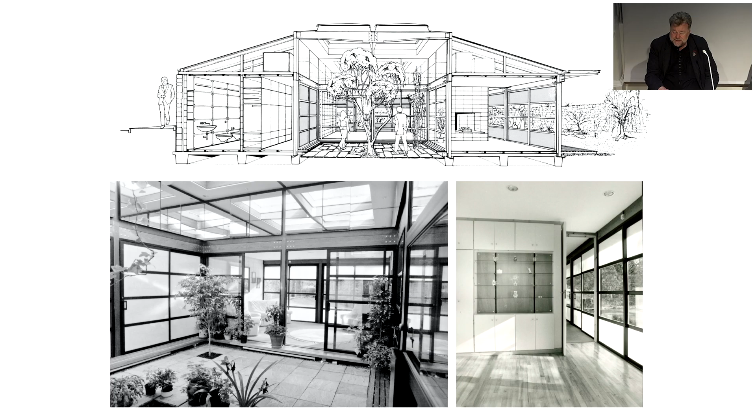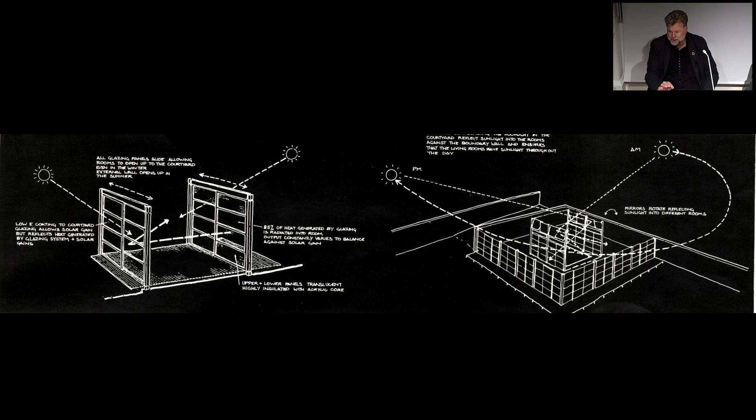It was designed very simply with a glulam structure framework. I've always been interested in materials, so it had a new glass technology invented in Finland, which is electrically heated glass. The low-E coating had an electrical charge put on it, which neutralized its U-value, giving highly insulated glass.

Basically, the building was in a kind of conservation area, so outwardly it was a stone building, but inwardly it was a very glass and glazed building. My parents lived there for many years. A while ago it was sold, so I actually managed to pick up this - this is just 2 years ago. I built this nearly 40 years ago.

So here we are, and we're going to have a little epilogue at the end where we finish in the same village where I was brought up in Scotland. Those are the Ochil Hills in the background, and here we have the little house. Outwardly, it's surrounded by a stone wall and reclaimed slate from an old disused building, which was part of the conservation deal. But inwardly, of course, it's just all glazing.

So yeah, excuse the graphics - that's not me. It was translucent glass, very simple. I remember the framework cost about £1,000, and the glass wall was £12,000. I can still remember the whole breakdown to this day.

It's a very simple house, but actually worked really brilliantly for them because it's one big open space that you could open and close. They've since changed, and buildings have to change, they have to flex. The new owners have converted what was the central garden into a music room, which works for them and probably works quite well. Originally, the central courtyard was actually a garden with a pond and so on.

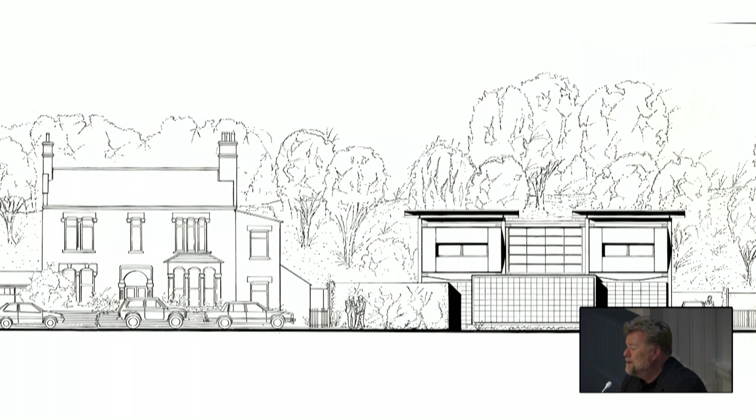After doing that, my wife and I decided, well, why don't we do our own house, which we did in Finsbury Park. We really learned from my parents' house and then used that again to develop our own house, which again was a glulam building.

This is now in the mid-90s. I was teaching at the AA. It was, I remember, £130,000 all in.

A glulam structure faced the street, so we had to have a kind of translucent wall facing south, and then a central courtyard, which again used passive solar heating. The central courtyard had a lot of thermal mass that captured the heat, and then we had a kind of Scandinavian air exchange system that took all that heat and used it to pre-warm the cool air coming in.

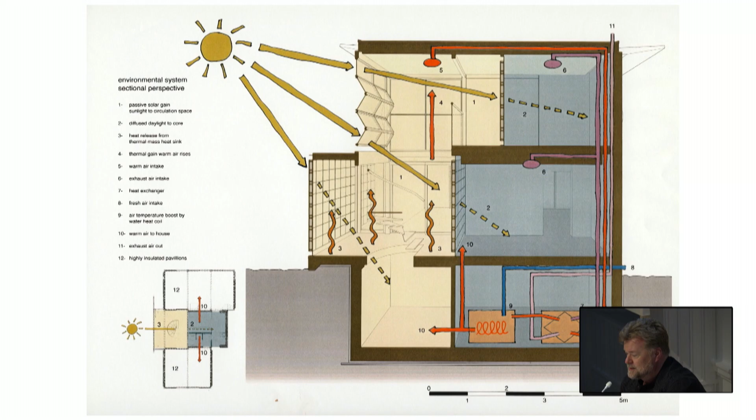So we basically built it ourselves with specialist contractors coming and doing different bits and pieces. I remember the frame was £2,500, glulam. Couldn't afford Douglas fir like my parents had, so we had to settle for white fir. But nevertheless, it was a fabulous building, and we really enjoyed living there and raising our family there.

But unexpected things happened, and we found ourselves moving to New York. So that's my little prologue of things you can do yourself, and I encourage you all to do the same in your own time. Actually, when you do things for yourself, you really learn, I think, more than when you do it for others.

So I'm going to talk about the last four decades at Grimshaw. I graduated in '86 and joined Nick at what was a 12-person practice. Now it's just over 600 around the world. So it's kind of evolved during that time, and so has the work we've worked on.

Really, when I joined, certainly in the late '80s, it was mostly industrial architecture that we did. And then really, by good fortune—being an architect is often about fortune, winning competitions, or just being at the right time at the right place—we were very fortunate. We did an exhibition that got us in the right place at the right time to win Waterloo. So a little 12-person practice found themselves doing the biggest infrastructure project in the country at the time, and I had to learn a lot of things very quickly.

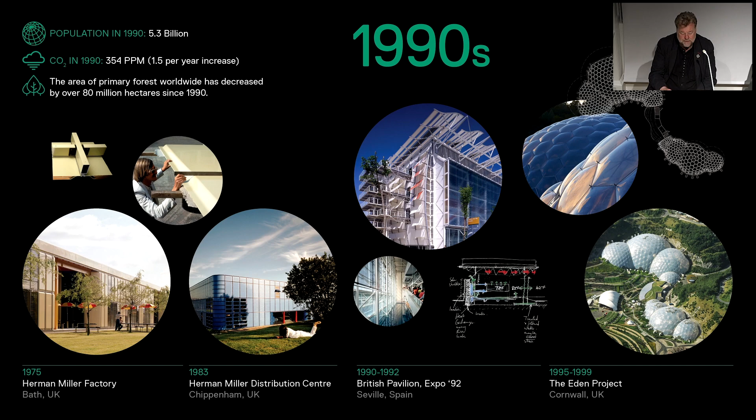But we then went on to win the British Pavilion at the World Expo, which I'm going to talk about, and the Eden Project, and so on. We've always had an interest in the impact architecture has on the environment and how it should respond, and how that informs its vocabulary.

As the practice has grown, so has the scale of projects, particularly in infrastructure following Waterloo, which I'm going to talk about their impact as well as we go through the different projects. But you'll read on the top left-hand side, as each decade goes on, how the population grows, the CO2 grows, and so whereas we might be interested in the environment, sadly most of the world hasn't been, but is slowly waking up. I think one of the challenges we have is how we turn the tide, which is what I'm going to talk about at the end.

So I thought I would pick up a number of projects and just pick up on aspects of those projects to explore. My first topic is harvesting the sun, which of course is a free resource you can use in all sorts of ways. And that's one of the things we did with the British Pavilion in Seville.

We wanted to explore what an architecture that responds would look like—this was the late 80s when we designed it, and there was an awareness in Europe, I think, of the impact buildings had on the environment. We were interested in exploring how that could inform an architectural vocabulary, how it would respond.

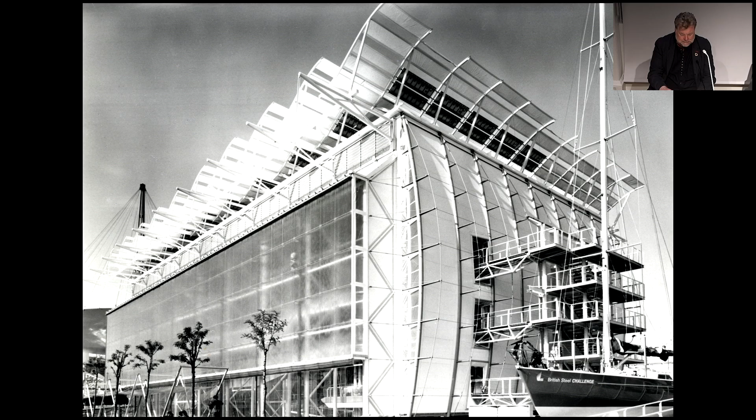The idea was, rather than trying to air condition the entire space—Seville is the hottest city in Europe—what if you create a buffering layer, and then just condition and cool it slowly? It's actually quite comfortable if you've got a large space and you drop the temperature to be in the 80s; you don't need to be in the early 70s. And then the exhibits themselves could be contained in lower temperatures.

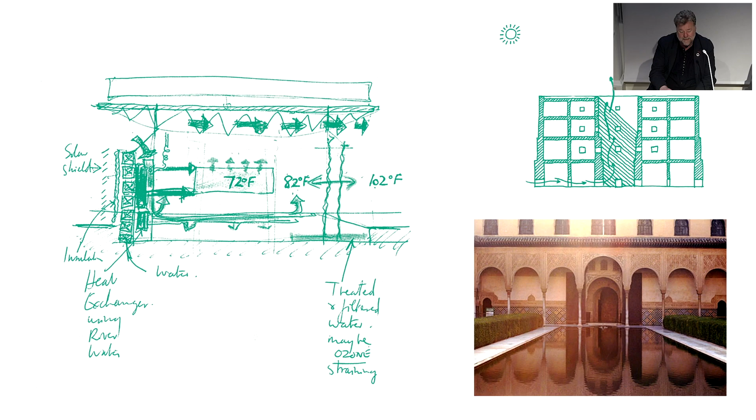The building had to be built in the UK—that was part of the condition—and then built very quickly in Spain. Often I think we've drawn on different technologies. Here, there's always been an interest in yachting technologies because they tend to be very lightweight, use fabrics, and are very easy to assemble. So the majority of the building was actually layers of fabric.

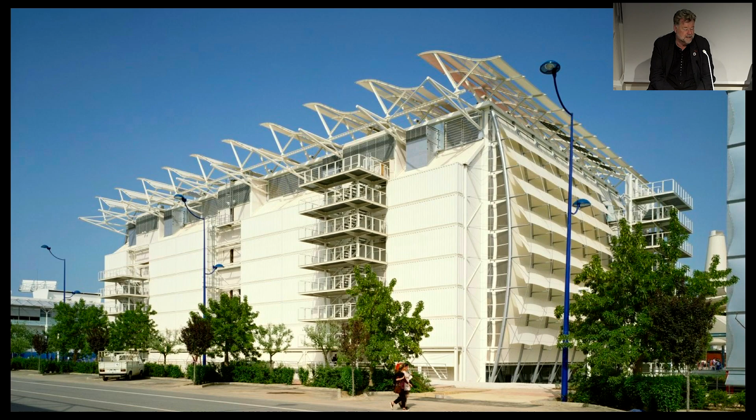Both particularly on two sides. On the back, it was actually built by stacking up disused shipping containers. The huge benefit that had, apart from being very easy to get and stack, is that we filled them, and it created a massive thermal mass that allowed us to cool the building at night time. We basically used it to absorb heat during the daytime and then recool during the night.

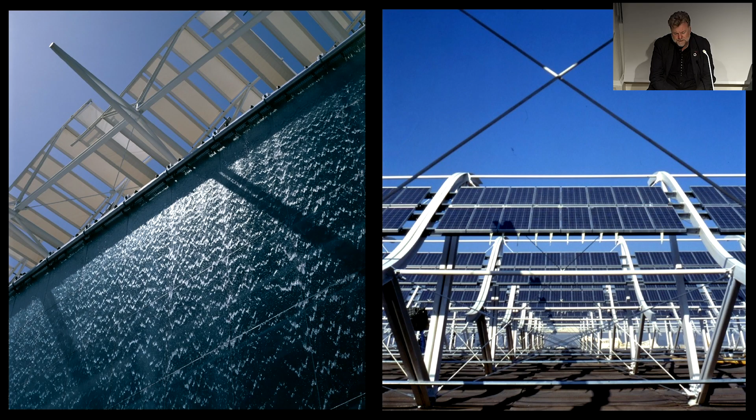And the main feature was the west-facing wall. There, it was probably one of the first uses of photovoltaics, which we had to borrow from BP - it was early days. They powered pumps that pumped water that then poured down the wall, creating this sort of calm oasis that you could go into.

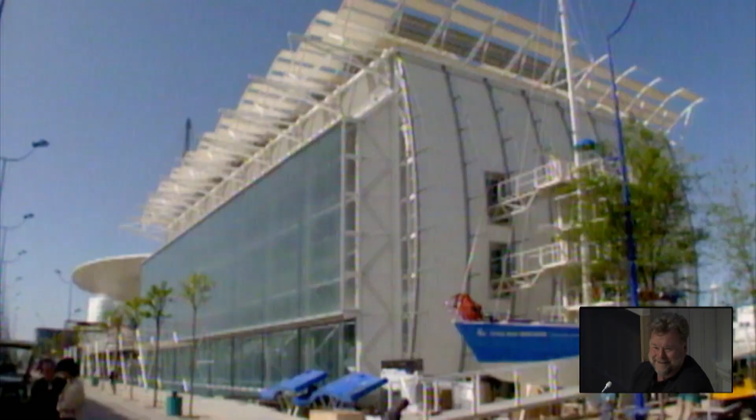Yeah, so this takes you back. Now, the reason this is so fuzzy is this is, for you youngsters, called VHS, which at the time was the height of technology - a cassette about that big. But anyway, this at least lets you see, because the building of course no longer exists.

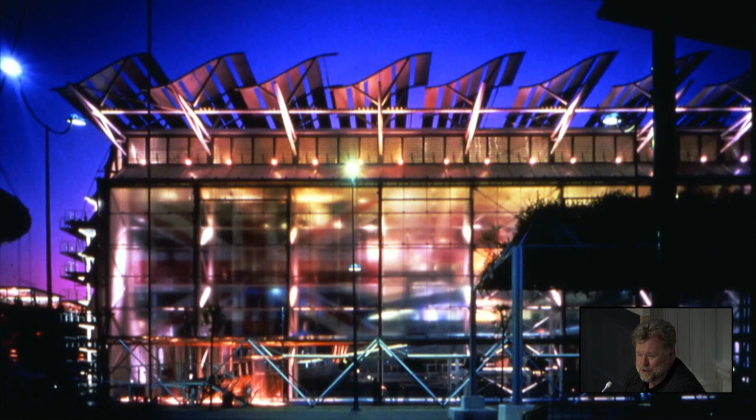You can see the impact of going inside the building, this water wall, and the feeling of coolness. Unlike a brise-soleil, which cuts out all the light, the lovely thing about the water was that it cuts out the infrared only, and the whole visible spectrum comes in, but with no heat. So the amazing thing was when you stepped inside, it was so cool, and all you heard was this crashing sound of water. For me, architecture has technological edges and parts to it, but also it must be beautiful and a sensuous experience.

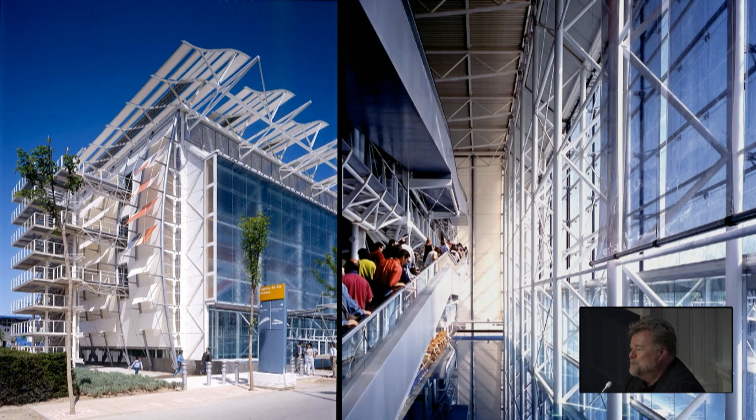We actually often use the term to try and encapsulate what our goal is: beauty through ingenuity. So ingenious design naturally leads, in my mind, to a beautiful outcome.

Another big inspiration for us, I think, has been inspiration from nature. I remember as a student, both when I was at Glasgow School of Art and also then at the AA, I used to spend a lot of time in the library with Frei Otto's Institute of Lightweight Structures. There was an amazing collection of books where he explored all sorts of things, basically learning from nature, whether it was spiders' webs, or bubbles.

And we're going to talk about bubbles now.

I've also had the good fortune on certain projects to have the opportunity to research. Following Eden, we've worked on a number of botanical projects, which allowed me to spend a few weeks in the Amazon rainforest. Like many people, you think of the Amazon rainforest as being the most biodiverse part of the planet, so it must be rich with nutrients that support this incredibly rich, fertile life. Of course, nothing could be further from the truth, because actually it's all built on a very thin layer of very sandy soil with very little nutrients on it.

That's why a buttressed tree, which is enormous, has buttresses - because there's nowhere to put roots down. The whole ecology of the rainforest is about being incredibly efficient with resources and using them in a very productive way. So as architects, it's such a great lesson to learn from.

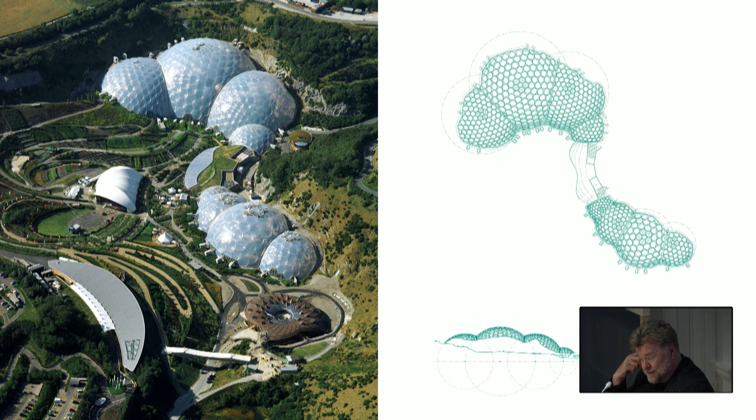So in many ways, it was an inspiration when we were doing the Eden Project. For those of you interested, there's actually quite an interesting exhibition on - I went this morning at the RIBA called Difficult Sites, and it's exploring architects' responses to very difficult sites. And we had a very difficult site. So, a couple of interesting guys.

Jonathan Ball was an architect, and Tim Smit, who was a real driver, was quite a force and became a good personal friend. He had this idea of creating giant enclosures to create an entire rainforest in Cornwall.

We found this site that was actually coming to the end of its life. It was an English China clay quarry, and they were trying to get the last bits out before they sold it on. So the site was changing form and shape, and we couldn't design a building to go into it. Originally we designed it a little bit like Waterloo, but I was very keen to use what was a relatively new material then called ETFE, ethylene tetrafluoroethylene.

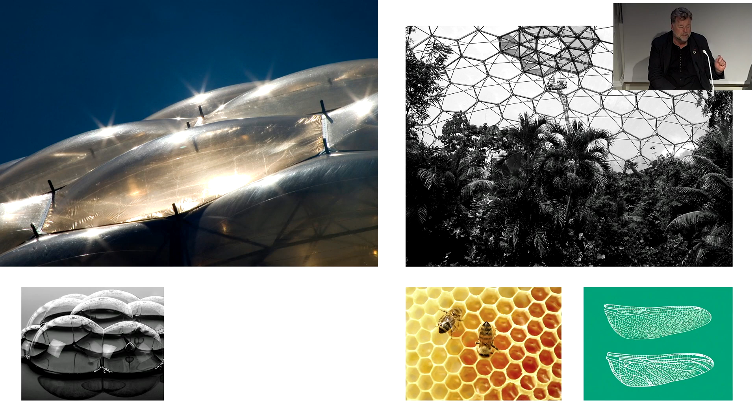It was a very lightweight polymer, an inert material, but it uses a fraction of the weight glass would use. So a glass and steel building, which is where we started, would have used—this uses less than 10% of the same volume of material because it's so much lighter, the steel frame's lighter, there's no material in the ETFE.

Again, this inspiration from nature—I remember Frei Otto had explored dragonflies' wings and how they connect, and that was quite an inspiration for us. Ultimately the idea was creating a form of interconnecting spheres, since soap bubbles never change their diameter or geometry no matter what size they are as they interconnect. It's got an interesting mathematical science to it. So the idea was if we made it in spheres, it could connect with the quarry in any formal way, and we could change it—it was a very dynamic response.

The thing I've enjoyed about Eden is there's a whole collection of buildings. Everyone focuses on the biomes, but the first buildings we built—the visitor centre, which opened the year before the biomes—were made using traditional cob, rammed earth, using the clay from the quarry. The reason it's pink is it was actually the original clay used for the FT paper, believe it or not. So that's why it's that pink colour. And then we used rocks we had excavated for the gabion walls and so on—so it's very much about being grounded in the earth and part of the landscape.

But of course, everyone goes to experience the biomes and step into the rainforest. Hopefully it allows a lot of people to experience the Amazon without having to fly there. So if you haven't been, I think it's an enjoyable experience, and there are also some lovely other gardens around there.

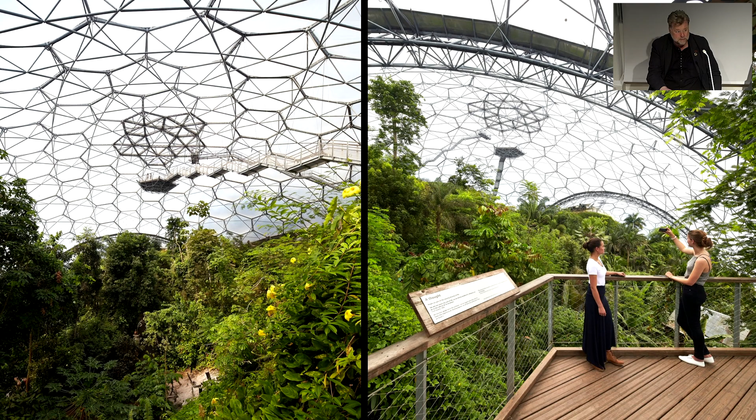It's been an ongoing relationship with us now for over 25 years, working with Tim in various ways. The Eden project has grown its own campus, and we've done various other projects around it. It's just building at the moment a very deep geothermal energy source that will provide all of its final power and heating, and also for the village of St Austell. But for me, the most exciting part of Eden is the impact it's had on the southwest of England.

It's hosted things like the G7 conference and so on, but it's actually created, outside of the project itself, over £2.5 billion worth of investment to southwest England and Cornwall, and has been part of a real transformation over the last quarter of a century in that part of the world.

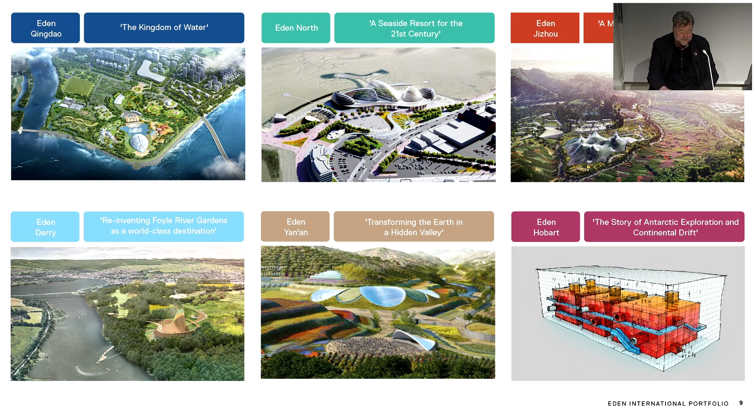So we've now been working with Eden on a whole series of different projects. Qingdao is the furthest ahead—I've only got old photographs I'm afraid, but it's pretty well finished. Each one has its own theme and its own response.

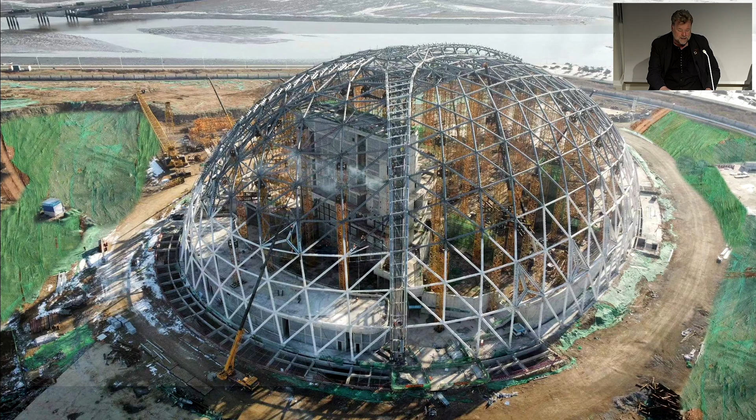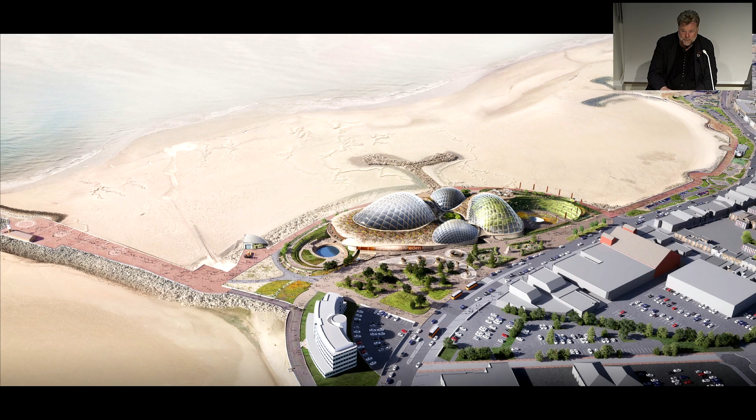And of course the latest, which I was very pleased about getting further funding for in yesterday's budget, is Morecambe—again a seaside resort town that's very much on its heels. I think this will have a similar transformational effect on the local economy. Eden itself employs over 400 people in Cornwall, and you can probably quadruple that for its local impact. So hopefully this will have a similar impact, as well as being a real inspiration for the next generation about learning from nature.

So a few years ago, I went to a fascinating conference with David Attenborough and E.O. Wilson, the Geographic Society, and little did we know, a few months later, sadly, E.O. Wilson passed away. But he coined this phrase, biophilia hypothesis, and for those who aren't familiar with it and his work, it's about our need as living beings to reconnect, to be connected to nature.

And if we live in cities that are just all concrete, with no, and we all experienced this during COVID, the real need to go into parks and to reconnect to nature. So his work was about this importance of connecting to nature, and it's something that I think we've tried to draw upon in our work.

So a good few years ago, when I was in New York, we were invited by Bloomberg's administration to put forward a competition for a new typology of affordable and sustainable housing. And we did this proposal with a guy called Jonathan, two developers, Jonathan Rose and Phipps. It was because they'd done competitions before and they never happened, and unless you have a client and a developer that's willing to take it forward, it's not going to work. So the idea was architects teamed with developers and put a joint proposal forward, and this was our proposal.

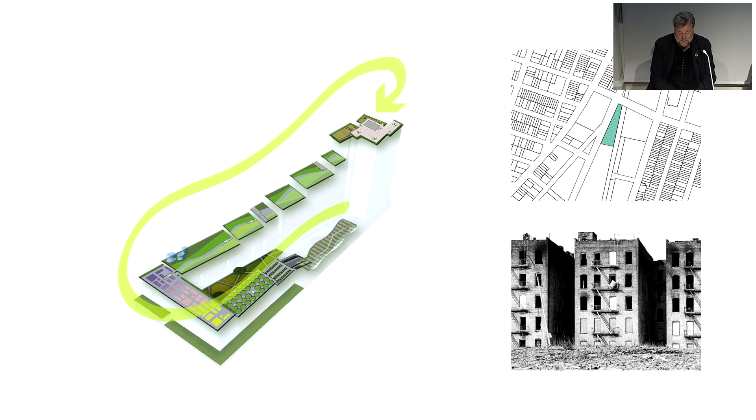So our approach was to create this sort of ziggurat of terraces where we kept all of the greenery and just put it on the roof and created a series of gardens. And it was a very challenging budget because it had to be built for the same price as the standard cookie-cutter affordable housing they do in New York. So that took a bit of imagination, but we managed to hold on to everything.

And because it was a narrow site, and that's why I found that difficult sites exhibition so interesting, because architects, when they have difficult sites, it's a bit like putting a bit of sand in for an oyster, it creates a pearl. If you have something to work against, it creates more opportunity to come up with creative solutions. So that narrow site allowed us to actually have all the housing cross-ventilated, which is absolutely unheard of in New York.

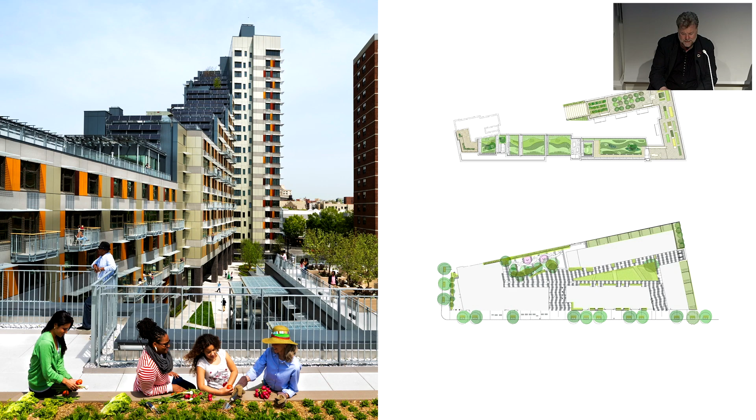And because they're sealed units with air conditioning normally, picking a little trick out from Corbusier, having the corridor every other floor allowed us to have every building have cross ventilation from one side to the other. So the circulation corridors are every other floor, and it meant that the buildings can open up to the greenery beyond.

They can be naturally ventilated, and these are 3 levels of affordability, from lowest income to different median incomes. And actually, the tallest part is purely rental, so it's for the lowest income, and then there are different levels of assisted affordability. 10 years on, the building's really doing well, and we shall see how it does in the Architecture Today awards later next month.

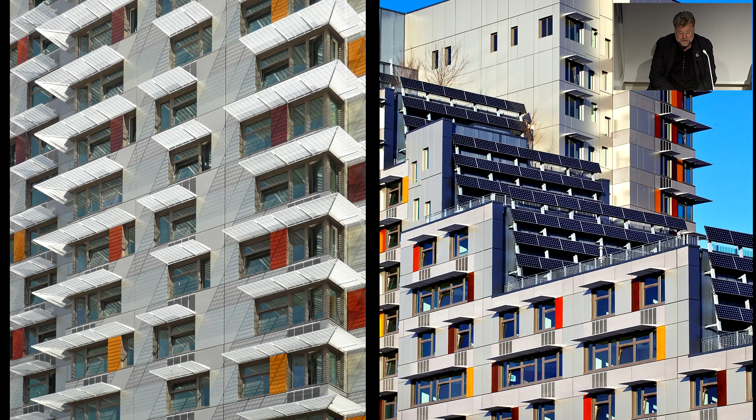But anyway, they've continued to improve, add batteries to the solar system and so on. So it's really been a success as far as creating a community, and that was the core to our design, this idea of community, because it was interesting, all the other architects that put forward proposals had different buildings for the different income brackets. And we felt it was so important that everyone was wrapped into one around a courtyard and shared a garden space.

So the kitchens all look down into a garden space that's safe. There's only one entry point into it. Children play in, and then you can make your way up to a sort of amphitheatre area where they have performances and events, and then up to the different terraces. There's an orchard, the productive gardens are really popular. And the best part is the lowest income bracket get by far the best views, right back to Manhattan, which is really nice. So it's been a big success.

And I think, as an architect, seeing how things can have an impact on community is so important, because we always like to think of ourselves really as being servants to society and to civil life, basically creating the opportunities that cities need.

And so, thinking more about sustainability and using what you have, this idea of ingenuity and ideas replacing technology in a way. I think another good example, and I've tried to pick different types of buildings.

So this is infrastructure now, and this was a competition replacing an existing station in Melbourne, Australia. The reference scheme we were given by the government had a large roof. There were diesel trains, and they'll have that for a long time to come. So they had a lot of mechanical equipment on the roof to ventilate it, other equipment to keep it cool in the summer, and so on.

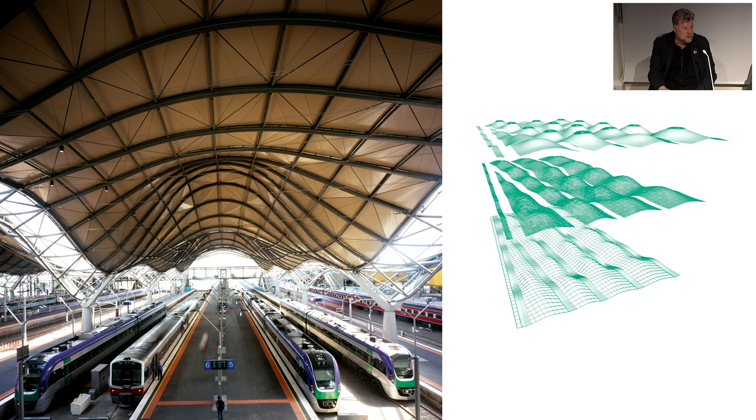And we were aware there were two quite strong prevailing winds going across Melbourne. So our thought was, well, what if, in the way that moguls are created or sand dunes are formed, you took that and reverse engineered it — you could take that form and shape of roof and use it to help ventilate and cool the space below.

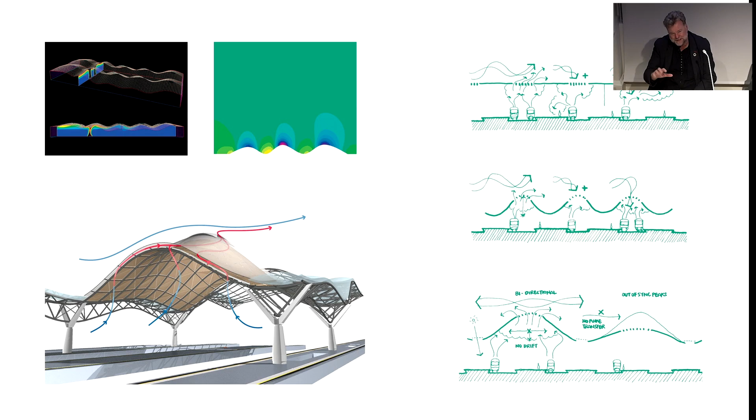Often with these ideas, you have an idea, you can draw it, you can sketch it, but of course you then go on to CFD, computational fluid dynamics, to really test it, and you do wind tunnel tests and so on to make sure it works. But the initial idea held true. And so, indeed, the roof form and shape is entirely about creating a performative response to the space below it.

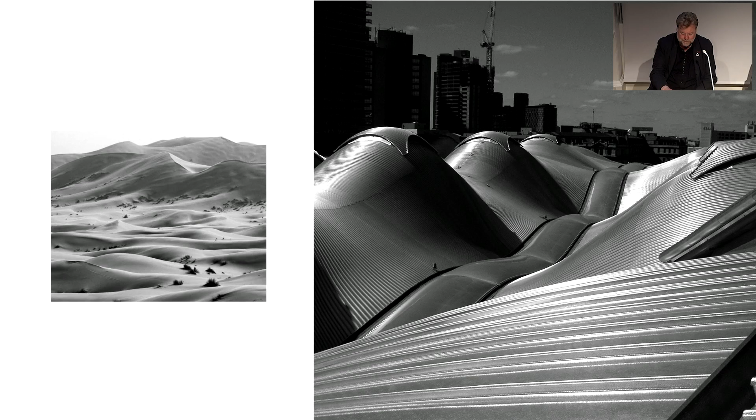Part of the reason they were replacing the building was to change how the city related to it. It was one of those classic examples where the tracks were cauterizing the city, and they wanted the docklands redeveloped. So we wanted to reconnect the docklands to the city. Really, the roof became the fifth elevation.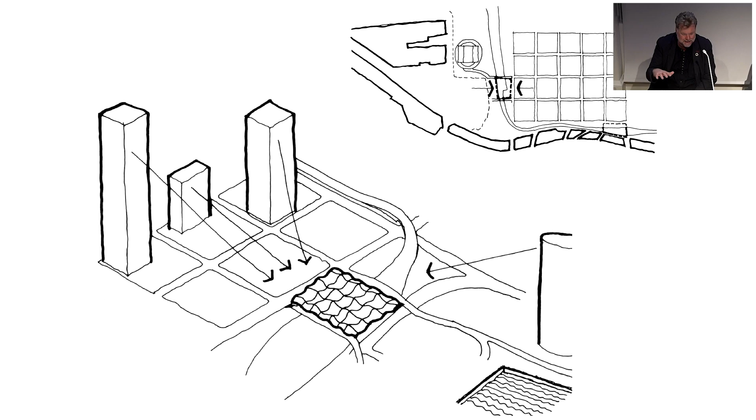I remember that old saying: just because you can doesn't mean you should. At that time, there was definitely a movement where, because we have these great computational design tools, people use parametric design to create really complicated shapes purely for the sake of it. In my mind, nature doesn't do that. Nature always responds in a very performative way, using the minimal material in the most efficient way it can.

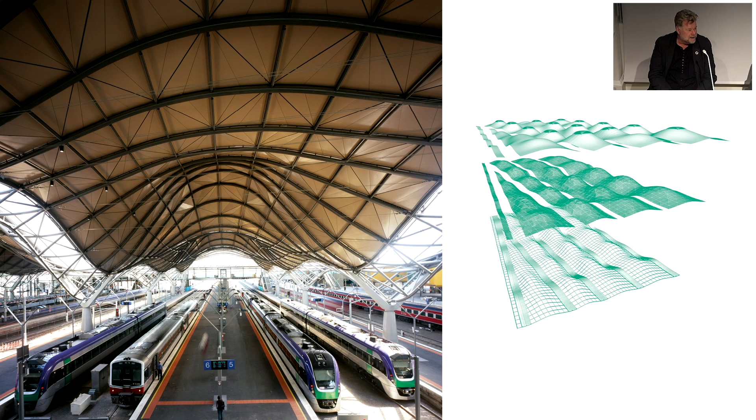And by doing that, it has an inherent beauty. I think if you capture that in your work, so there's a reason behind everything, then there'll be a more ingrained and natural beauty within your solution.

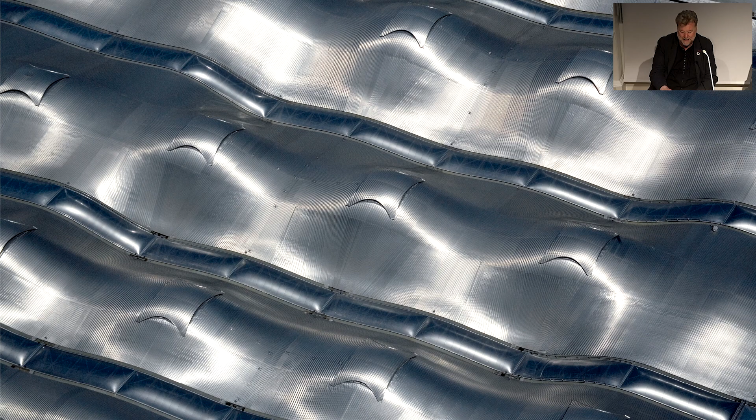So here, the sculptural form gives a landmark and a place for an important building in Melbourne, but the shape is very much driven by what it's actually doing. That idea of using your mind to solve problems rather than just relying on technology is something we're really keen to explore. I think people looking from the outside think we just look for technological solutions and apply them, but it's actually far from the truth. So that's why I've picked a few projects to illustrate that.

It was a kind of ideas competition, and we were really interested in how the building could be part of the science — it was a lovely little science museum, but they got this grant to build a new building by the ocean, on a bit of reclaimed land. We thought the landscape and its relationship to the sea was key to coming up with a solution, really thinking of the landscape in Florida and the topography, creating this connection back to the climate there.

We were lucky to get a Department of Energy grant on top of our fees to do additional research work to see if we could reduce the energy by at least a third. Museums typically, and particularly ones with aquariums, use a lot of energy. Aquariums, believe it or not, you have to cool them all the time, so they use a lot of energy. So we thought, well, actually, it's a very benign environment in Florida.

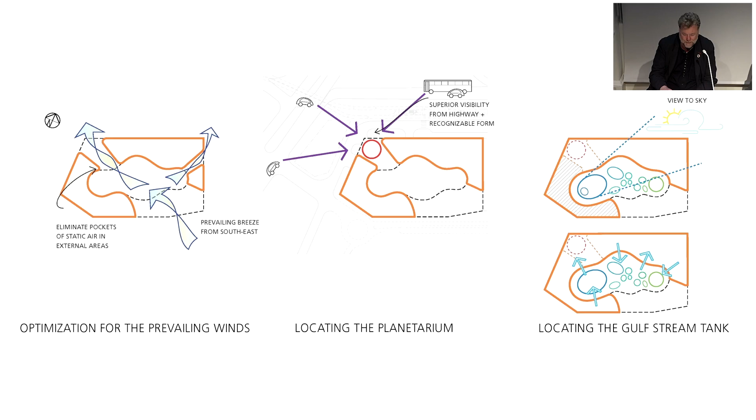So we did little sketches and ideas, backed up with computational fluid dynamic analysis and so on. It allowed us to have all of the circulation outdoors - the escalators, the elevators. Part of them is sheltered above because of the downpours of rain, but basically it relies on funneling the sea breeze through, so there's a constant breeze running through that keeps it cool enough to make it pleasant for everyone.

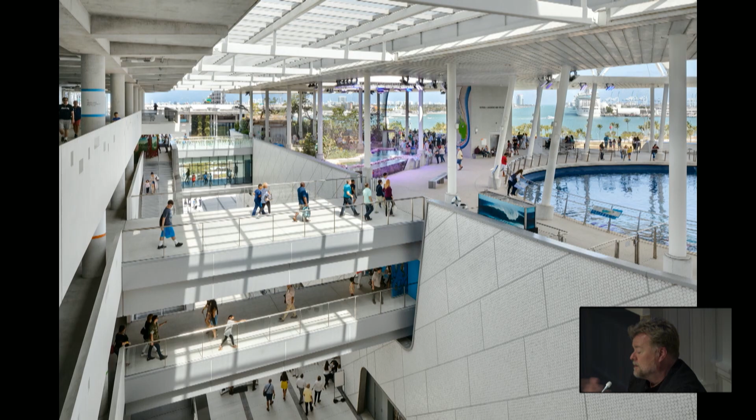And what's wonderful is, rather than being in this box cut away from the beautiful Floridian landscape, when you're up at the higher levels you look out to the ocean. The top of the aquarium is actually open to the sky, and then you go down and explore it through the different exhibits, and when you come to the very bottom, you then look up to the aquarium.

We wanted to create this illusion - I should have put some sketches in. It was inspired one evening in a bar in New York where we were looking at martini glasses for some reason. And New York does very good martinis.

We realized if you created the walls to the aquarium that slope outwards, when you look in you'll never see them. So you can create the illusion that a diver has when looking from the bottom up - you just see the expanse of ocean, you see the fish swimming round. That's the illusion that we kind of created.

These buildings, the impact they have locally and on the local economy is really fascinating. I mentioned new builds are part of it, but there's a much greater awareness, particularly in this country, of the importance of reusing what we can with adaptive reuse. People think we do a lot of new buildings, but actually...

Probably a majority are actually working with old structures, because we do a lot of railway buildings which were generally built 100 to 200 years ago. So we're often working with, like London Bridge, existing buildings. But it's really interesting to go back and work on one of your own buildings.

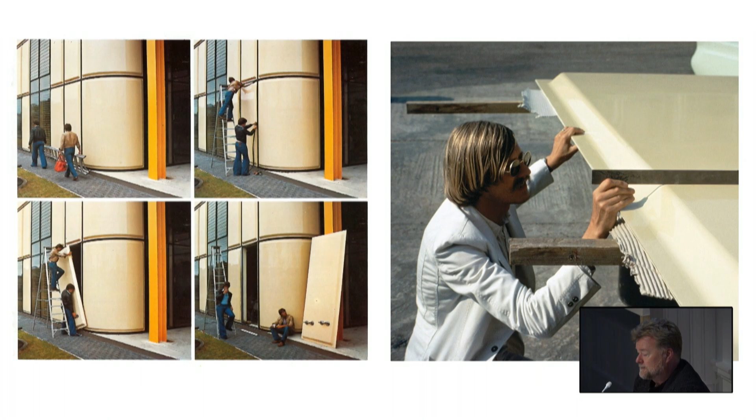One of Nick's earliest buildings, when he was with Terry Farrell, was a factory for Herman Miller. It was inspired at the time by this flexible furniture system called Action Office. The idea was you could actually change it, and the panels could move. During its life as a factory, they moved the cladding 8 times as they moved different operations around, because it had a view out onto the River Avon, and you wanted the windows where people were.

They eventually needed a bigger facility, which we designed for them, and the building was sold to the Bath School of Art and Design. So we were tasked to convert it to a building of today - no longer a factory for furniture, it's a factory for creativity. And it actually works really well as a factory for creativity.

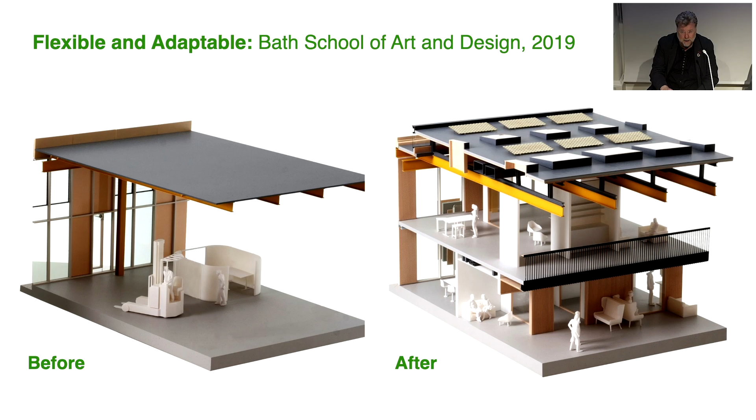So we took all the panels off and upgraded them, so the whole building now performs at the very highest levels of specification for today. I think it demonstrates - it was pretty well out of 50 years of use at that point, and hopefully it will have even longer use now in a really efficient way as a school of art and design. It demonstrates what we need to do to our existing building stock: you can upgrade it, change it, and find new use for it.

So we've been exploring this work since I've been with the practice, and I think the last decade has been really important for us. We made this commitment in 2019 for all of our buildings to be net zero ready by 2025, which we're pretty well on track for. We've developed a series of buildings on different continents, so we'll talk about two or three of them now. In Australia, the Middle East, different parts of the US and the UK, which has given us the opportunity to understand what doing a net zero ready building means as an environmental response in very different climatic locations.

We thought we needed to develop tools that allowed us to audit what we're doing and create an audit trail. The big thing that's happened over the last 6 to 7 years is an increased awareness of the importance of embodied carbon on buildings, not just operational carbon. Up until 6 or 7 years ago, everyone was very focused on how efficient your building could be, and more money's gone into making buildings efficient, but funny enough, sometimes at the detriment of their embodied carbon.

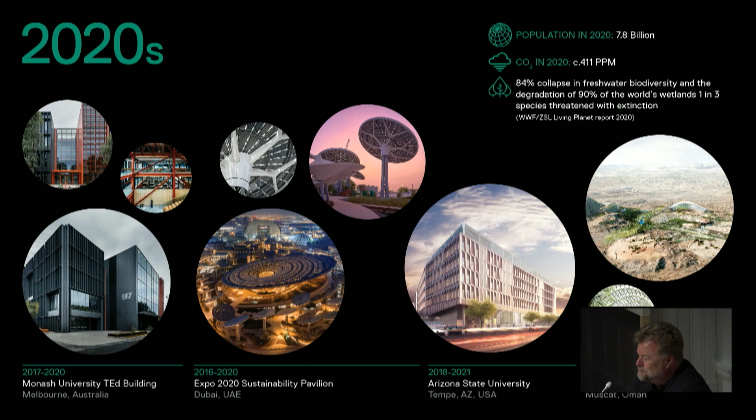So we've developed tools, and we got so far on that, and we ended up creating a relationship with the World Business Council for Sustainable Development, who helped fund and support us to develop a new kind of operational analysis tool, which we've called Minoro. You can look it up after this. I'm not going to go into a lot of detail because it's a whole talk in its own right, but it allows you to track and analyze carbon. Because we've worked in different parts of the world, we worked with over 90 different consultants, people and agencies.

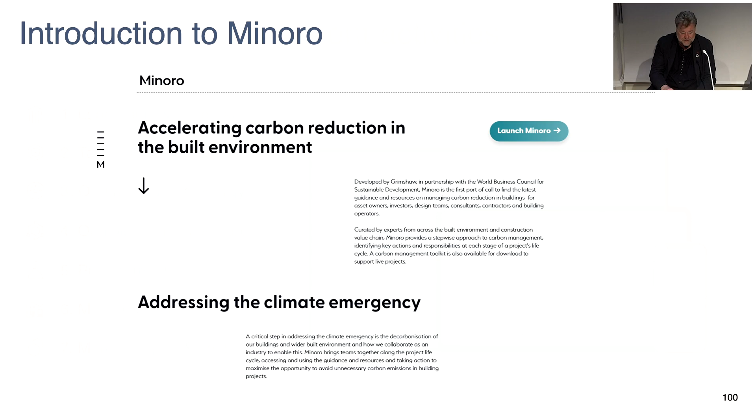Agencies like the AIA, the RIBA, the AIA in Australia, etc. So it operates in all the regions it works in: Europe, America, Australasia, the Middle East. It also works for all the different users involved in making a building: clients, cost consultants, engineers, architects. It's open source, available to everyone, and the more people use it, the better it will get. We felt the only way we can change the tide is to share everything we can and try to get as many people on the same side.

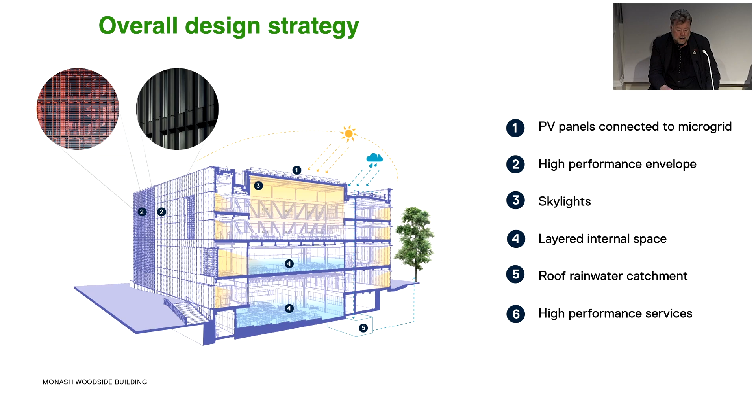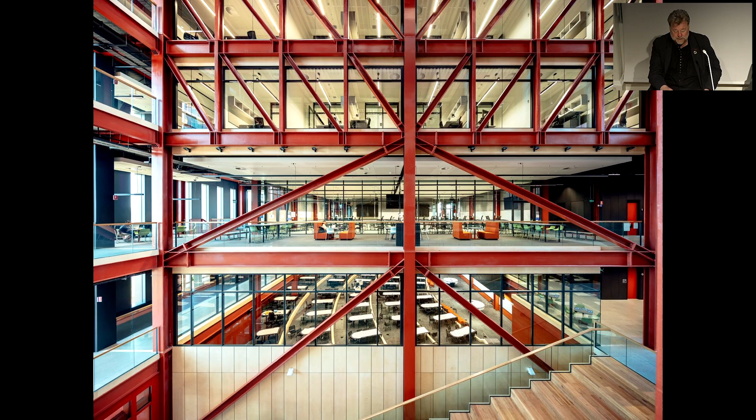So just a couple of projects to finish off on that. This is the Monash TED building in Melbourne, a research building for science and technology. I think it's the largest passive house in the southern hemisphere, with some very interesting pedagogy models, different types of teaching, different lecture halls, different ways of exploring academia. It was an incredibly fast building, we did it with Lendlease in just over 2 years from start to finish, but nevertheless we managed to keep all the environmental standards, both in its operational content and its embodied carbon content. The majority of the steel is recycled steel. It's been very successful, and that's one of the buildings we've drawn on.

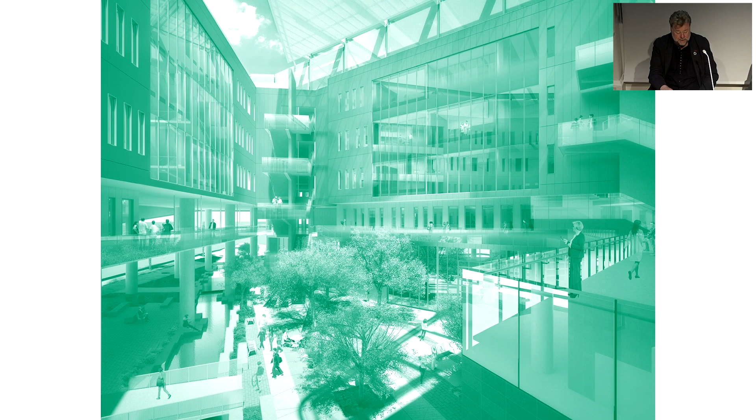Another one, the Walton Center for Planetary Health at Arizona State University, again learns from the environment it's in. The environment in Arizona might be hot, but it's very dry. The original spec we got was to have a big atrium space surrounded by lots of labs. Now labs are incredibly energy intensive, so trying to do an environmentally sensitive lab is a lot of work.

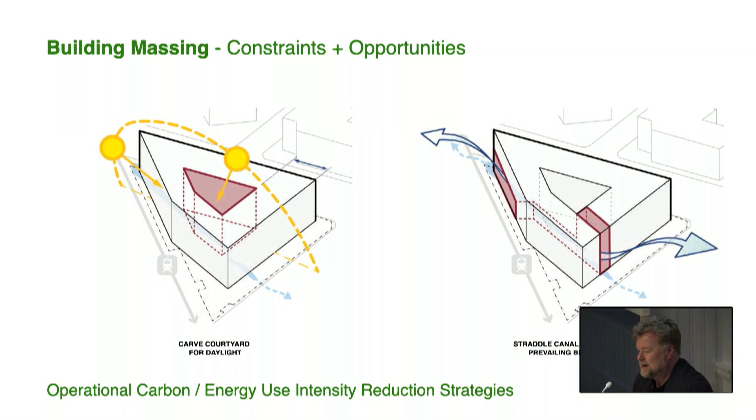And again, we realized there was a canal running through the site, so we would have to straddle it. It had all sorts of interesting features. We thought, why don't we just lift the building up, and the landscape and atrium could just be open - it's Arizona, and the climate's actually quite beautiful. We created almost a kind of landscape interior.

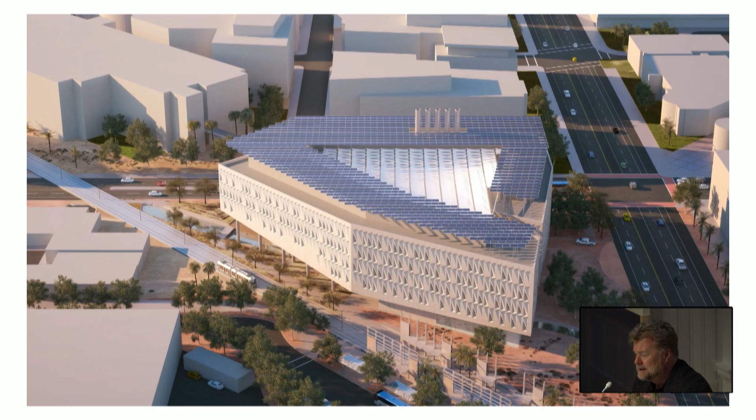So the core is open. And then the building responds to different conditions - each side of a building is different. The sun lifts up on one side and drops on another. So the modernist approach of every side of a building being the same isn't the right approach.

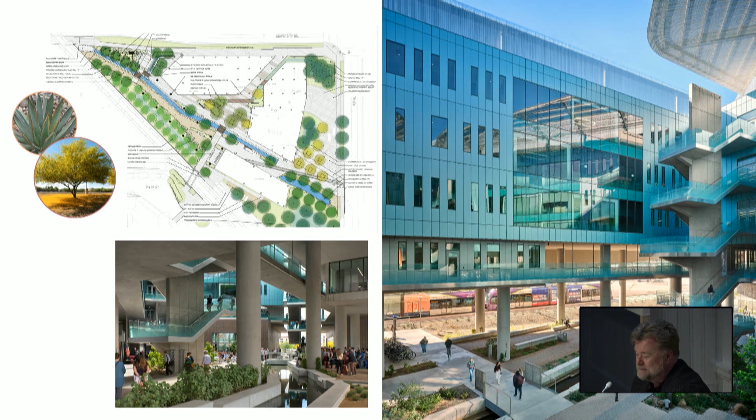Here's the center - the canal just runs through it, the landscape runs through it. You come into the building, and the labs circulate around that. Every side of the building, we were inspired by cacti and how they deal with sun and shade - it's this idea of layering of facade, where each facade is different depending on its orientation to the sun. So the building's surface is also responding to its location.

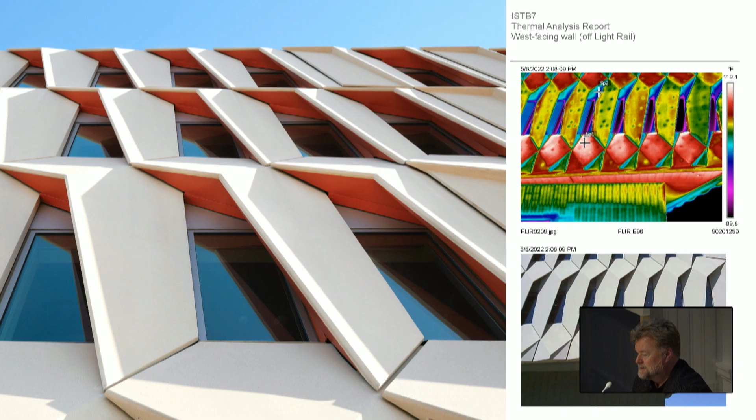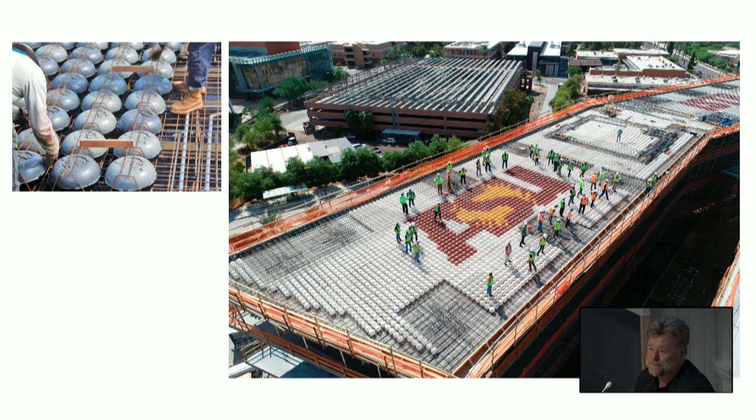And embodied carbon is really important, so we tried to reduce the amount of concrete. A technology we used on the building we're going to look at next, the Sustainability Pavilion in Dubai, is called bubble deck, which reduces the amount of concrete by about a third, but also makes it lighter, so you're putting less load on the rest of the frame. It takes concrete out - these are just technologies you can use to reduce the impact of your building.

So the last building I'm going to look at is the Sustainability Pavilion, which I got personally really involved with, and it was a fascinating competition. We were asked with five other architects to put forward a proposal for a sustainability pavilion, which would be the anchor for the World Expo in Dubai.

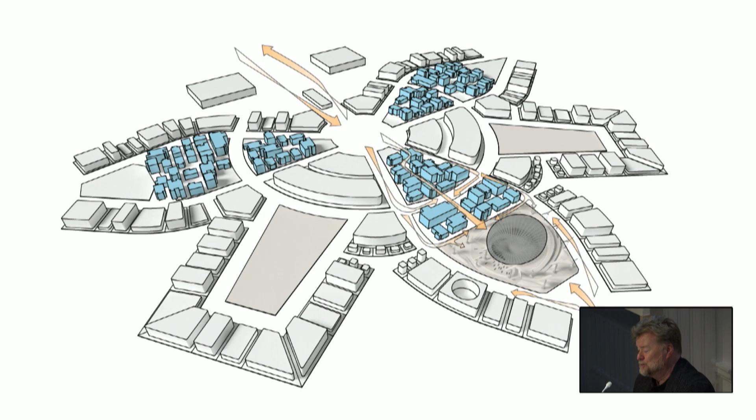The Emiratis are actually quite clever - they don't invest money and then throw it away. For instance, with the Expo in Milan, they're still trying to figure out what to do with it. The Emiratis took a different approach - they actually designed the permanent solution first, then worked backwards into the Expo.

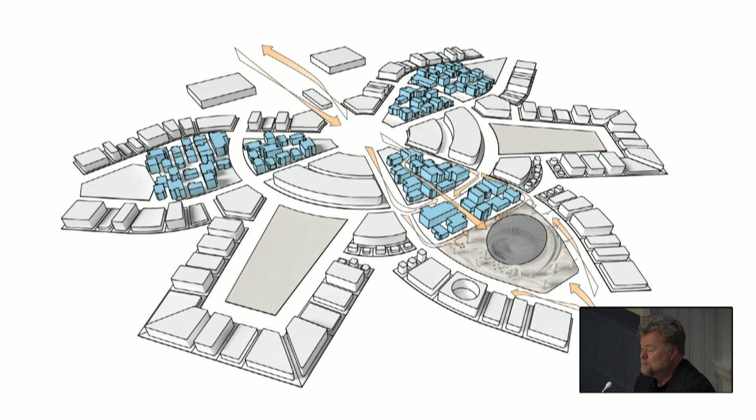The Expo had three zones - we were in the middle, sustainability, then mobility and opportunity. These three zones were all to be permanent, with a view that this will become a permanent city, an extension to Dubai, which is now happening. You may have read they're making big moves, actually moving the airport from one side of the city to this side. So this will become a kind of aerotropolis and a new incubator innovation district for Dubai.

But six years ago, that was what we were given - literally a bit of desert, and that's the story of Dubai. It's just an amazing place where transformations can happen very quickly. In 3.5 years, they built 250 buildings, the equivalent of the West End of London. It's quite amazing what was built.

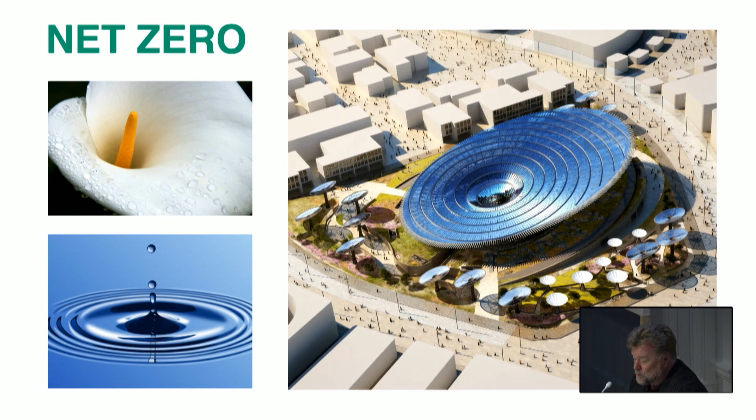Our approach was, let's really demonstrate in the world's harshest climate that you can do a true net zero building, triple net, that generates its own power, generates its own water, deals with all its own waste. And if you can do that in Dubai, in the desert, in such extreme conditions, you can do it anywhere. There were 25 million people who did actually come in the end, despite COVID. It's still open now, a permanent research and exhibit centre.

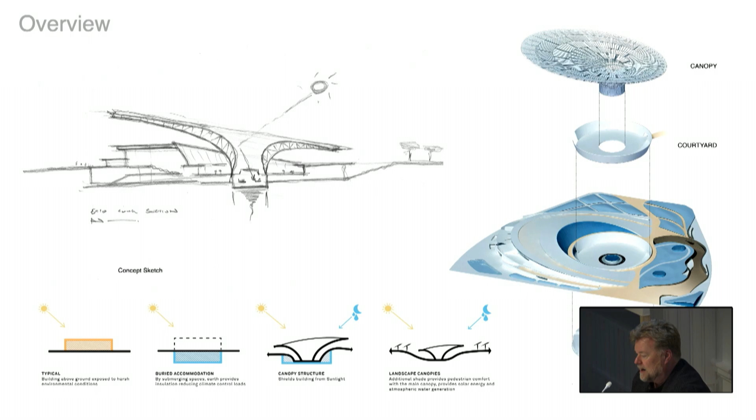The first thing we did, about idea, is design your way out of the problem first. Most of the building had to be black box exhibition space, so you could sink that below the ground. Immediately, it means you're in a much lower temperature environment, so you've dropped your cooling load - you don't need as much cooling. You work with the landscape. So half the building is literally below ground because the site was regraded, and the rest, we took the landscape up over the roof, so it sits under a very heavily insulated garden, effectively. Then sitting over that is the canopy that keeps the courtyard cool.

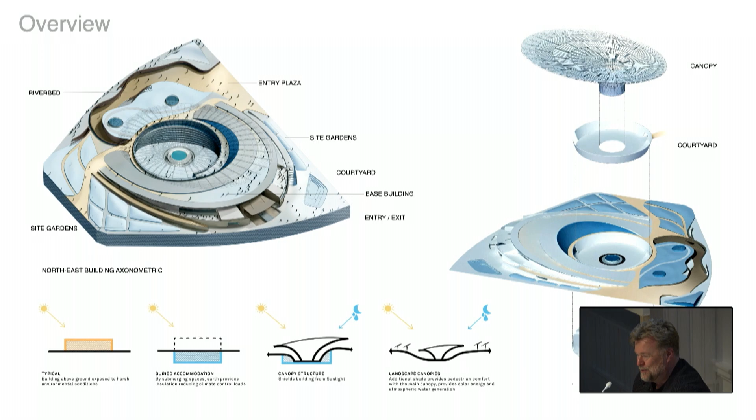The way we like to do these things, the circulation is all open to the air, and the canopy helps cool that. It does a number of things. You can see the landscape going up, round and over, and then the canopy floating over that. It helps direct breezes through the site, and it really keeps that courtyard several degrees cooler, and moving the air through it makes it much more usable throughout the year, as well as harvesting energy.

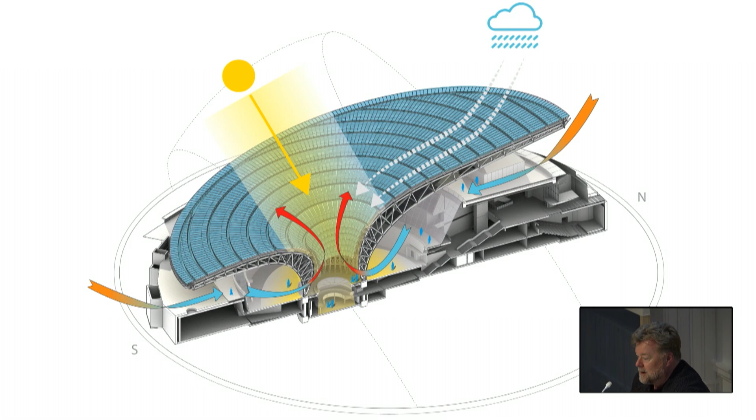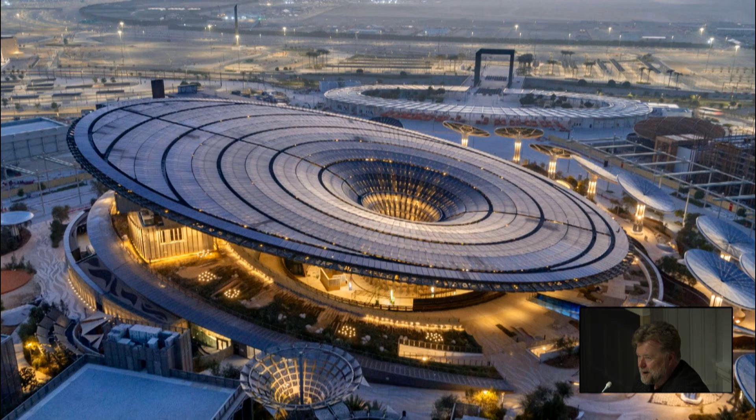That was the idea of the canopy floating over the building, and it was inspired by the ghaf tree, where you get these trees with deep taproots that can be in the middle of the desert and provide this beautiful shade. So this was our kind of ghaf tree, harvesting energy and providing shelter and shade.

We had about 3 years to build the building. So this is, you go down before you go up. The whole site had to be regraded for various reasons, which meant we could create this kind of underground section to the building. I was quite keen that the idea of collecting water would be a central part of the building.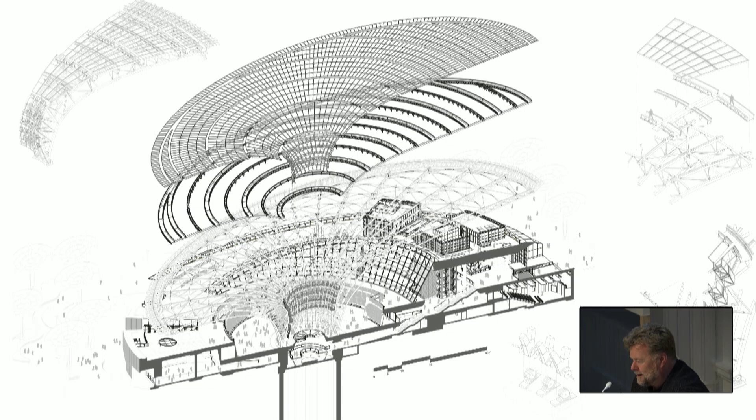You'll notice I still really like doing isometric drawings, and that comes from having 2 years of working with Jan Kaplicky. Every drawing I did had to be an isometric.

We also wanted to reduce the weight of the steel, which was mostly recycled. We actually halved the load of the steel in the building and really tuned the building as much as we could. So the canopy is really light, very lightweight, and it just supports this glass skin that has the inbuilt photovoltaics. The cladding is all reclaimed stone from a nearby mountain range in these gabion walls. So half the building is underground, the other half is just stone. We've reduced, if you like, the embedded energy in the envelope and cladding.

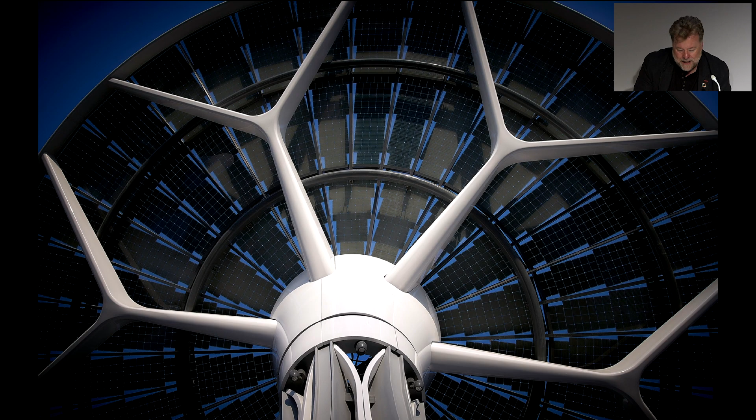Of course, the one technological intervention we need is harvesting the sun to power the building. But the roof wasn't enough to collect enough energy for a whole year because the cooling load, particularly in the summer, is quite high. So we were quite inspired by these dragon trees from the Yemen Peninsula, and we did these, what we call energy trees, dotted around the landscape. They help shade the landscape like floating trees, but also harvest another third of the energy.

They're much more efficient because we used carbon fiber to make them as light as we could, and that meant we could put them on a gimbal. So throughout the day, they track the sun.

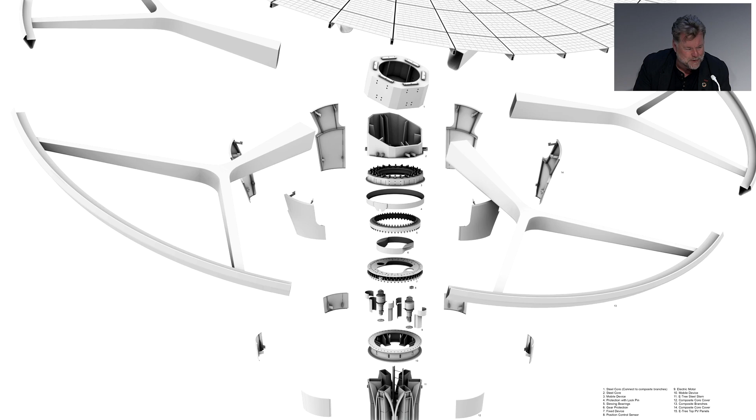At the time, I thought that'd be great because it's an expo, there'll be like kinetic sculptures, people really enjoy seeing them move. I hadn't really thought, well, yes, but they move over 12 hours, so unless you go back and come back 3 hours later, you say, oh yeah, they've moved. But nevertheless, they do what we wanted them to do.

They harvest the sun as the sun goes around the building, so they're tracking it, but also, of course, maximize the shading in the garden below.

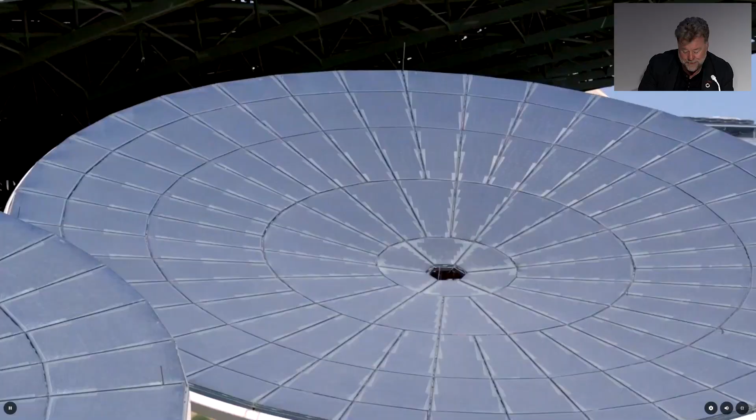Here we go. So these, I think, are speeded up so you can actually see them moving properly. When I was designing them, I thought that's what they would look like, of course. But anyway.

They're what's referred to as bifacial PV, so they actually get energy both on the front and the back because you get light bouncing off. So they're even more efficient. And as I mentioned, they go around the site, they help shade.

Then the landscape, we wanted to be an integral part of the whole experience. We worked with our friends at the Eden Project, and a really great firm we've worked with a lot since called Desert INK They went out into the desert and found plants that hadn't been used in landscape. The desert's full of seeds that only germinate when it rains, and they just explode.

So we wanted to create a xeriscape, in other words, not a landscape with grass and deciduous trees from another part of the world transplanted into the Middle East, but a landscape that's all about the indigenous plants of the Middle East. It uses very little water, and yet it's actually, in my mind, even more full of colour and vibrancy, and really, again, we're talking about that kind of sensual experience of being immersed in a space.

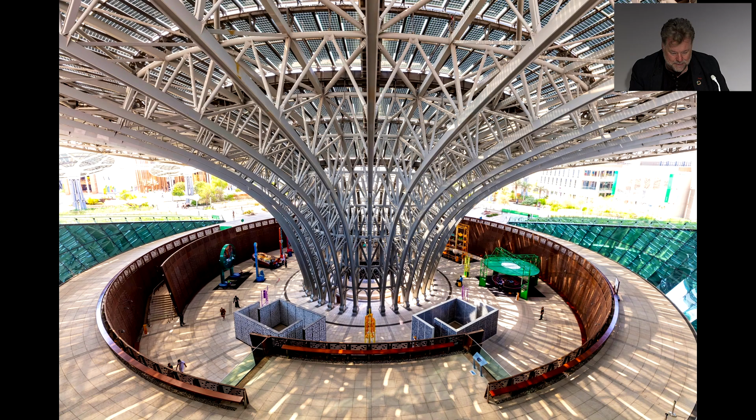So just finishing off a few pictures - this is the main view looking down from the top of the highest part of the roof into the landscape roof, into the courtyard.

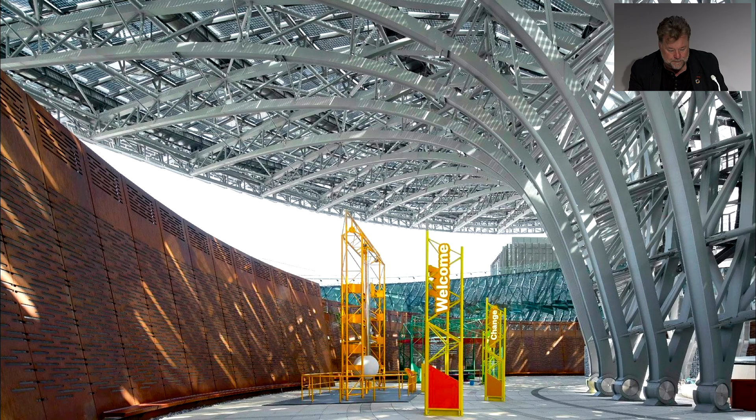During Expo, we brought people into the courtyard and split them up so we never had a queue. It was probably the only pavilion that had more people through it than any other, but never had a queue. We did that by getting people to go through the building in different ways.

I won't go through the exhibitions in detail. We worked with Eden on exploring Johan Rockström's planetary boundaries, working with Johan's team on the themes through the exhibition. Part of it takes you through the forest, all about root systems and under the oceans. I won't show the finish of the exhibition, because if you all go to Dubai you'll see it - it's all there, you can experience it.

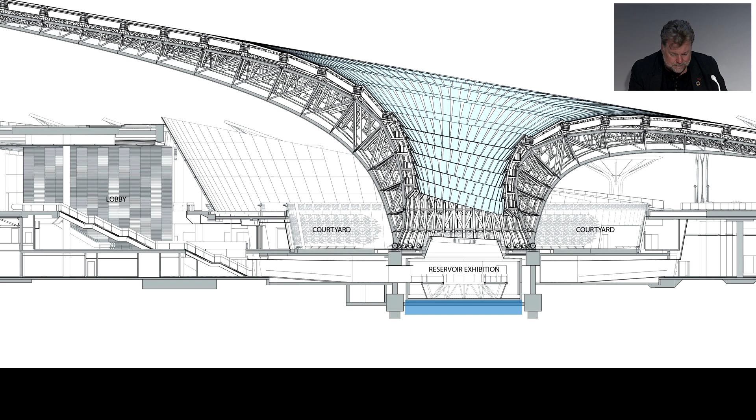You then come to the centre that I started with - you come into the outer core, and then make your way down into the inner core. That's the very heart, the lowest part of the building, where you look down on the water that's being generated - it sits over a pool of water. From there you can look down into the pool, and then look all the way up through the building to the sky, so you get this connection of water and sky.

We added some elements, like an amphitheatre, which has been really heavily used since, and it hosted COP28 - this is where the World Leaders Forum was held.

So now it's a permanent building. You actually enter it where you used to leave - you enter into this main entry space, look out into the courtyard, and then circulate around the building. As I mentioned, it's now a permanent research centre and institute, a kind of science centre dedicated entirely to sustainability. Because we've now run it for two years, we know it's actually net positive - over the balance of a year it generates more power than it uses and puts net power into the system.

So finally, I'll finish off with my epilogue. We started in the village of Dollar, so I'll finish there too. A few years ago, I met the new head of the school, a young guy called Ian Monroe, in Boston, looking at this really interesting school set up by architecture PhD graduates from MIT.

It teaches school kids in a way you would at the AA - they work on projects, in teams, with continual assessment, and it's had incredible results, with kids going on to great universities afterwards. It's been running for a few years.

Using that, we thought we'd develop an educational program in a centre, then COVID came along, so it was put on hold, but online teaching happened and they found they were quite good at it. In conversations with Ian, I thought creating a set of courses around the UN's Sustainable Development Goals gives something for everyone - if you're interested in science, technology, or the environment, you can do that; if you're interested in inclusivity and politics, there's something for everyone in every course.

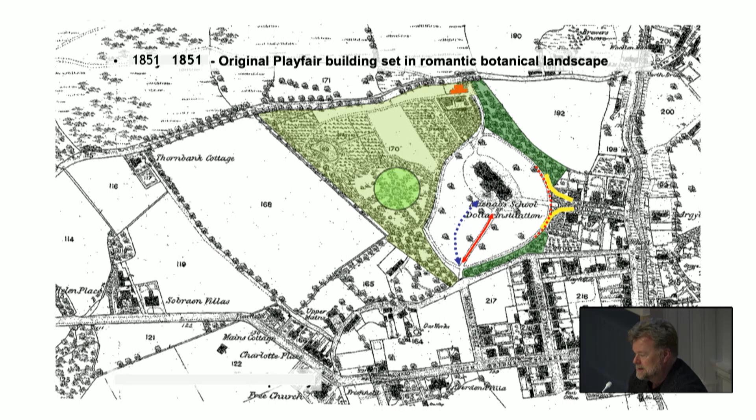So we thought, well, if we recreate that environment as part of the solution - a sphere, a dome, is quite a classical kind of response, and we could do it in a very contemporary way, yet it's still a kind of classical icon, if you like. It also allows us to do a really lightweight, economical, big building. So it's a glulam dome with ETFE and so on.

I'm really excited about the landscape part as well, it's immersed in this landscape, so it sort of sits within it. It's a very conservative village in many ways, very traditional I should say. My brother now lives there, and he said if anyone says I've got the same name, I'm going to say it's by accident, because he was expecting to be vilified about putting this modern building in. But it was the exact opposite, it had huge support, went straight through planning, and we're hopefully now starting construction next month. So there's the Ochil Hills in the background, and it has that kind of soft form.